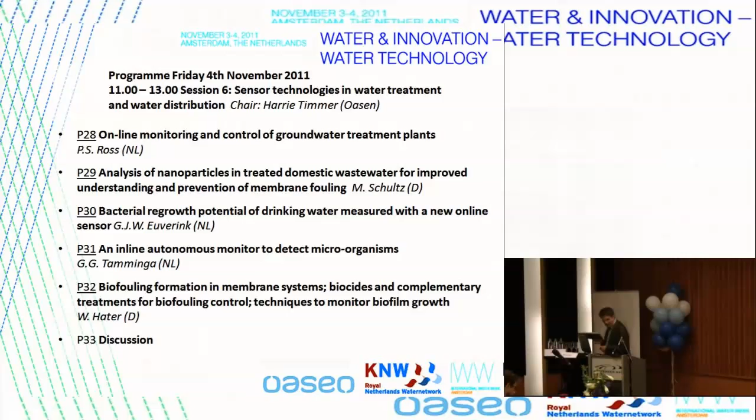Thank you very much for your nice introduction. Actually, the institute where I'm working is the Institute for Technology and Management at the University of Groningen. I'd like to present some results on a project which we did in the framework of SAWA. SAWA is a sensoring network which was established in the north of the Netherlands. It's a collaboration of a lot of different small sensor companies.

We are trying to address all kinds of sensoring issues in the distribution network, so after the purification of the water. Also, the intake water is of importance, so we have a project on surface water monitoring, the quality of the water in the distribution network, and all kinds of different parameters like temperature, pressure, flow, and particle analysis in the tubes. And also, very important, as Harrie just mentioned, is the regrowth potential of the water.

It doesn't make sense if you purify your water and put it into the distribution network, and then you have a lot of bacterial growth, and the water comes to the customers with a lot of turbidity. That's not something you want. We actually have a demo site in Glimmen, the building next to it. It was a pilot plant building from the Water Laboratorium North. It has been rebuilt into a sensor test center, and we have the different water qualities available for the different companies to measure the real water.

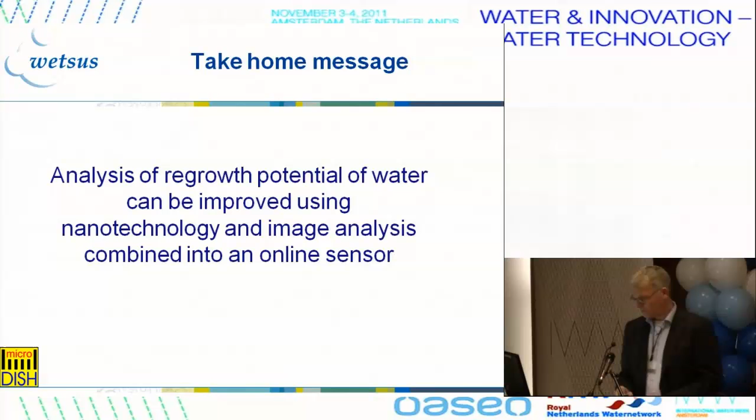So my take-home message is that the analysis of the regrowth potential of water can be improved using a combination of nanotechnology and image analysis. And in the end, you can build an online sensor with this. Well, Harrie just mentioned my sheet. With the current methods, it takes a long time to measure the biofouling potential or the regrowth potential.

The two current methods I'm aware of: one is the assimilable organic carbon in the water, a technique which takes 10 to 12 days before you have results. It's not always correlated with the real regrowth potential, so it's a parameter that gives you a clue that something is wrong. The other method, according to Water Laboratorium North, takes about 30 days to 3 months before you have any results.

That is a method where you put glass rings inside the distribution network, and once in a while you take out a glass ring and analyze the biofilm on the glass. Then you need several time points before you have an accurate measurement. You need fast results if you want to optimize your treatment scheme. So I thought, how can we actually address bacterial growth in a fast way?

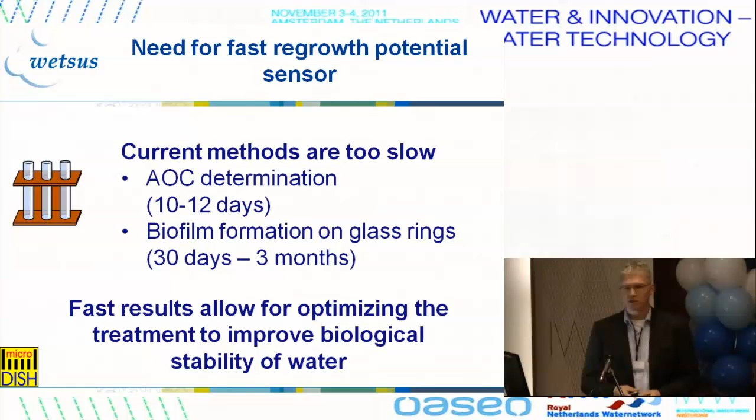I came up with a method where we have a kind of flow cell where the water flows underneath, and the nutrients in the water diffuse through to a small chamber on top of the flow cell. So outside the water, you inoculate bacteria. It doesn't matter which one: indicator bacteria, recombinant DNA bacteria, special color bacteria, any strain you want, because it doesn't come into contact with the water. It's outside the system.

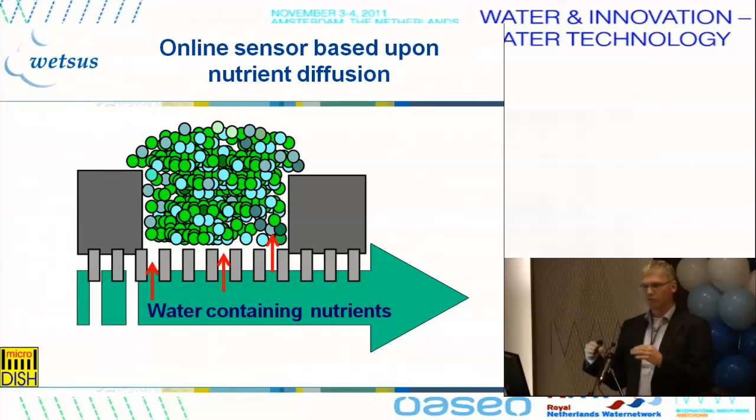The nutrients necessary for growth of the bacteria diffuse through that layer, and then the bacteria start to grow. The only thing you have to do is analyze the bacteria on the chip. There's no flow cell between the microscope and the bacteria, so you don't have disturbances from fouling of the flow cell. You just put a microscope outside your water and analyze your bacteria. We analyzed different barriers we could use, and we came up with porous aluminium oxide.

This is a very nice material. It is very porous, so nutrients can diffuse freely from the water to the bacteria. It's inert, so the bacteria have no problems growing on this material. It's flat, so it doesn't have a fluorescence or imaging background when using the microscope, giving nice and clear pictures. And because it's flat, you'll always have a nice sharpness of your picture, and you can do this automatically rather than by hand.

It's low cost. You can do some microengineering with it. It's biocompatible, so different types of bacteria grow as fast as on standard agar media. And for microbiologists, you can also grow organisms which are not able to grow on agar. So if you use this kind of material, you can grow a lot more organisms than on standard agar plates.

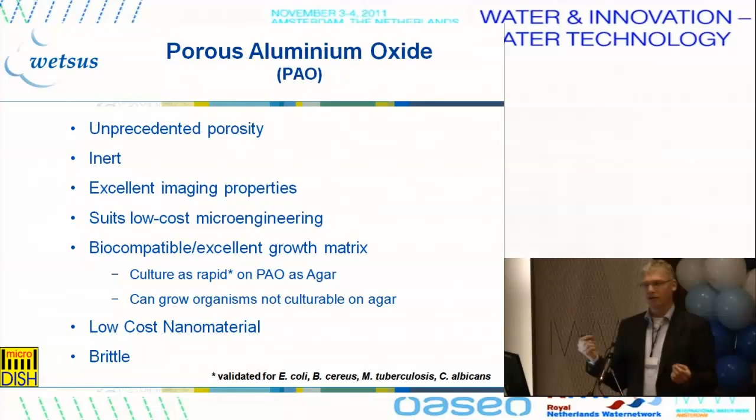It's low cost, and the only drawback in this system is this kind of brittle material. If you take one of these with a tweezer, you have to be very careful, because otherwise it will break.

Well, this material actually exists. This is a platform technology from a company called Microdish, a startup company from the University of Wageningen, and they made this into a culture chip.

So instead of using agar plates, where bacteria are streaked out on a surface and grow, you can use this kind of material, which is also subdivided into small culture chips. You can place this on an agar tray. The nutrients will diffuse through that ceramic, or aluminium oxide material, and the bacteria will grow. But now you can have a lot of different cultures on an agar tray.

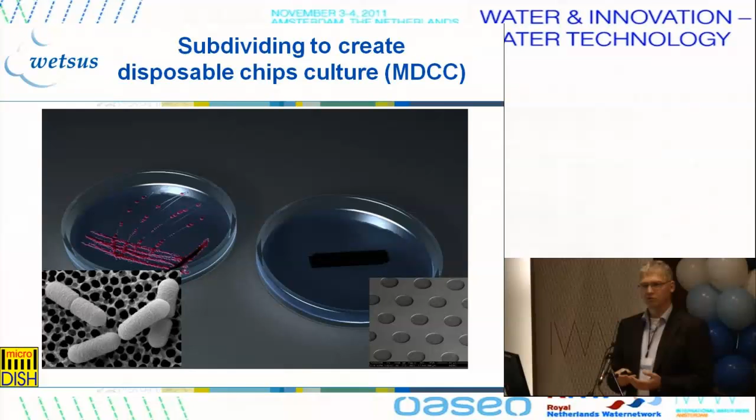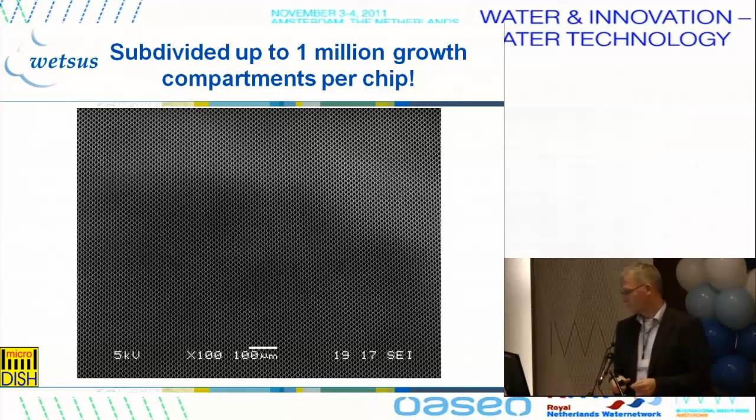And if you do this, you can have 1 million small wells on top of this agar plate, and you can actually inoculate a bacteria in every single well if you use automatic inoculation or micro manipulation. So the idea is that you have indicator bacteria that will grow on top of the chip if there is a regrowth potential in the water.

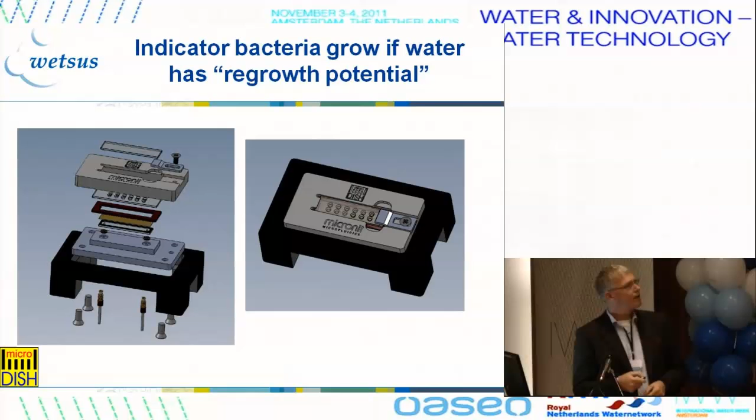This is a seal. There is a material which gives some separation of the different wells before you want to inoculate the different bacteria. A cover slip, and of course, in the end, this was made by Micronit, and we tested this device, the first version. It was reasonable, okay. We had a nice flow of water going underneath the chip.

But not everything was as good as it seems. In the first version, we had some tubing leakage, but most of all, it was a little bit too thick to fit on a standard microscope. And what we saw when we grew organisms in this, the visibility of the organisms with a standard microscope was not that good.

So most likely we need to stain the microorganisms before we can image the bacteria. Well, this is a bit of a problem, of course, because then you cannot do really online automatic analysis. You still have to add a dye, and that usually means you kill the bacteria. But there are solutions for that.

So we came up with a version 2 of the flow cell, which solved most of the problems. There was an improved sealing, so no leakage anymore. We also fitted a temperature sensor in it to correlate the water temperature a little bit with the growth of the bacteria. It is a lot flatter, and you can fix this quite easily on a standard microscope.

Also, there was a small minor problem. The cover slip of glass was usually quite difficult to mount, and we had some breakage. But with this seal, this solved the problem.

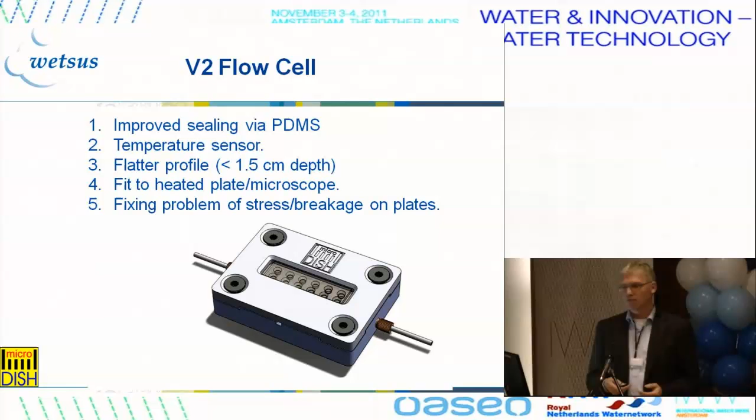Well, then it comes to actually using this device. This device is ready this month. So we are going to test this device starting from January in the real water of Water Laboratorium Noord, the real purified water. But this technology has already been used by other groups.

The groups of Paulien den Hartog and the Tropical Institute in Amsterdam used this chip to measure Mycobacterium tuberculosis. This organism is a really slow grower and is very difficult to cultivate. By using these chips, they can grow colonies of mycobacteria and already see this within 8 days.

They can actually follow the growth of the bacteria. This is a chip inoculated at day 0, and you can hardly see anything. At day 3, you can see some small dots appearing. If you do a single measurement, you have no idea if these are bacteria or just particles or dust which comes on the chips. But because you are following in time, you can actually see your colonies growing. And if you compare this growth rate with the normal growth rate of a mycobacterium, you are quite sure this is the strain you are looking for, and that the patient is really infected with a mycobacterium.

These chips are placed on an agar tray, on a standard growth media for mycobacteria, and every day these chips are placed into an automated microscope. Because this has robotics inside, the chip is always placed at the same position underneath the microscope, so they can actually see that all the dots are really the same dots when they analyze this. And from this, you can make a growth curve.

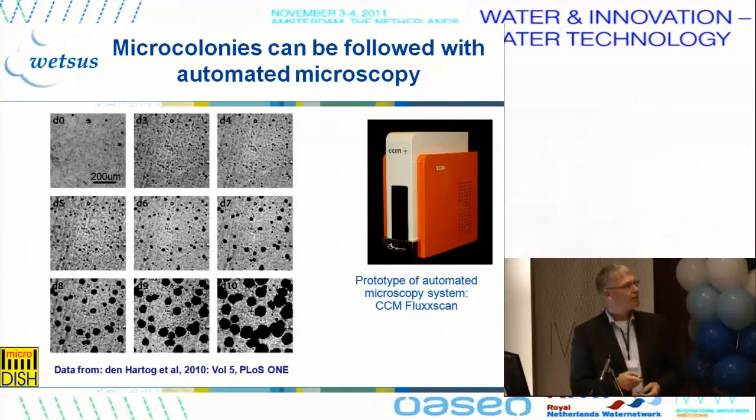Of course, you need to detect the bacteria in the beginning. We did some inoculum tests on these chips and determined the minimum amount of cells necessary to be present at T0 before you can detect something. If you do not stain your material, you need a lot of cells inside such a well before you have a nice image. This is done for E. coli, and you need about 2,000 cells. Yeast, the candida, is of course a little bigger, so you need fewer cells. But overall, if you stain your cells, the sensitivity goes up, so you need fewer cells before you can see a nice signal. If you stain with Syto 9, you only need 10 to 20 cells at T0 before you can actually see something.

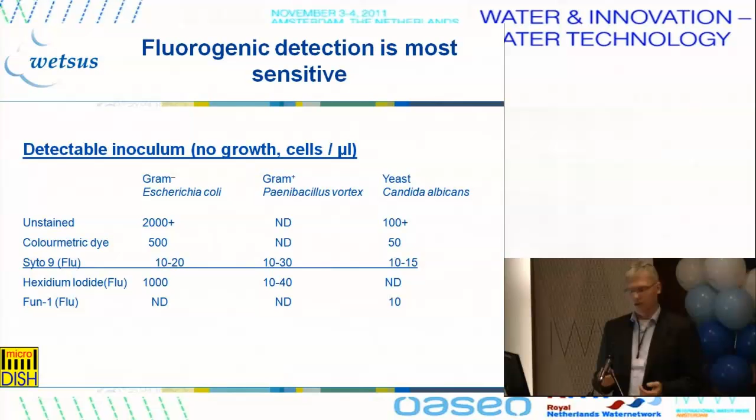I described some of the problems we envision with this fluorescent staining, and also the imaging analysis. These automatic microscopes are quite expensive, but there are trends and technologies coming up that let you use very cheap microscopes. The top part is a €55 microscope, it gives an image on the left, so you need quite a lot of cells. You have less sensitivity, but your system becomes way cheaper. If you use a €30,000 microscope, of course your image quality would be much better.

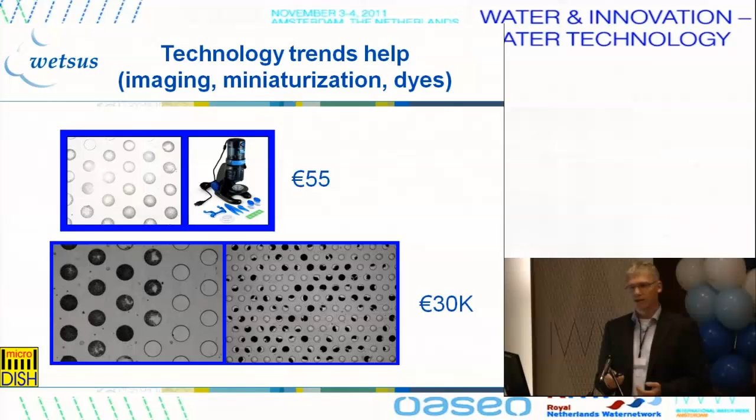So the sensor, the flow cell, is being made, I think it's almost done. We will test this material, and I hope to show you the results of this flow cell at a future conference.